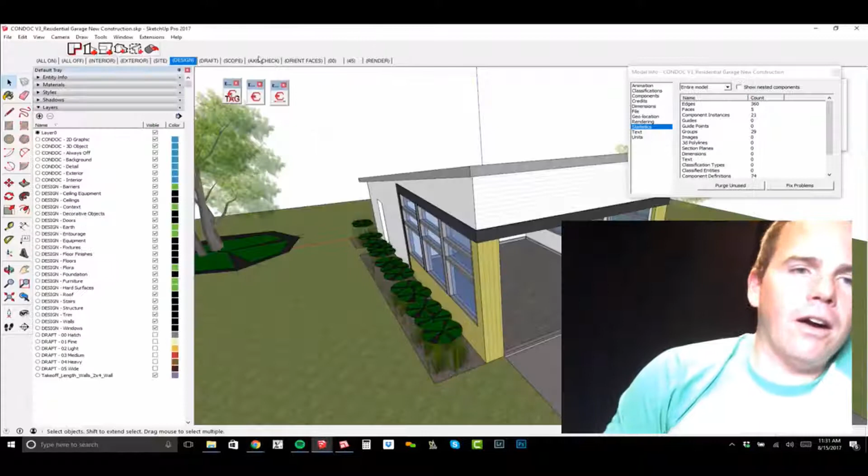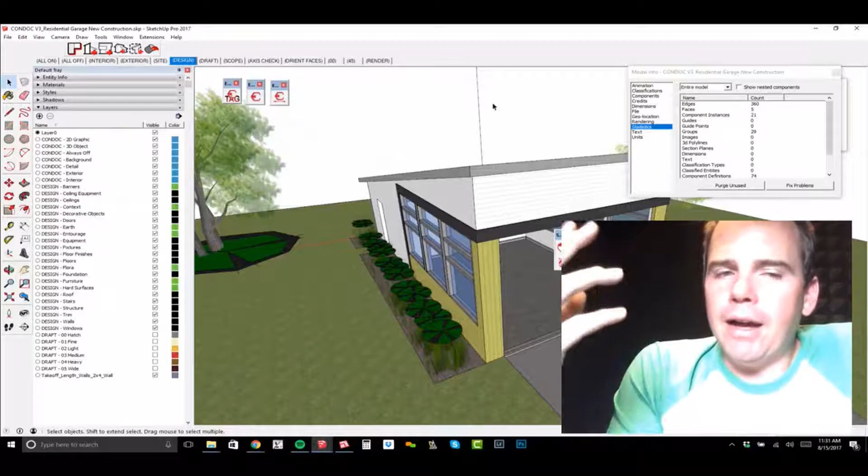Definitely. I gotta say, I've been tinkering around with Skalp, and it's working really well. It's pretty cool. Let me see if I've got it installed. I don't think I have it licensed on this computer. So anyway, I won't do a demo, but I will say that Skalp is working, it's really cool what it does, and I think it's well worth the $80. It seems, in my experience, that it works better on a simpler model, but I haven't gotten all the way in there and tinkered with every setting.

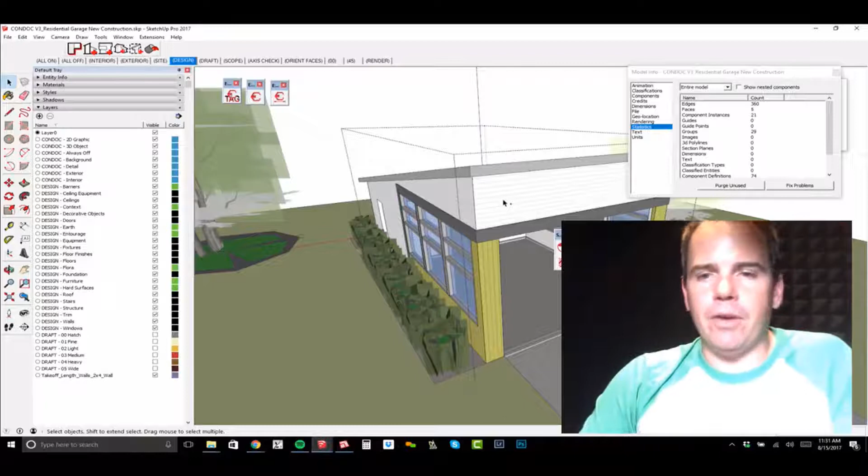I have a feeling that if I were to just hatch per layer, because of the way I build my models for CONDOC, I could hatch just the walls layer. That way it would potentially disregard everything else and maybe simplify that whole process. So anyways, I'm pretty confident that Skalp is going to be really solid.

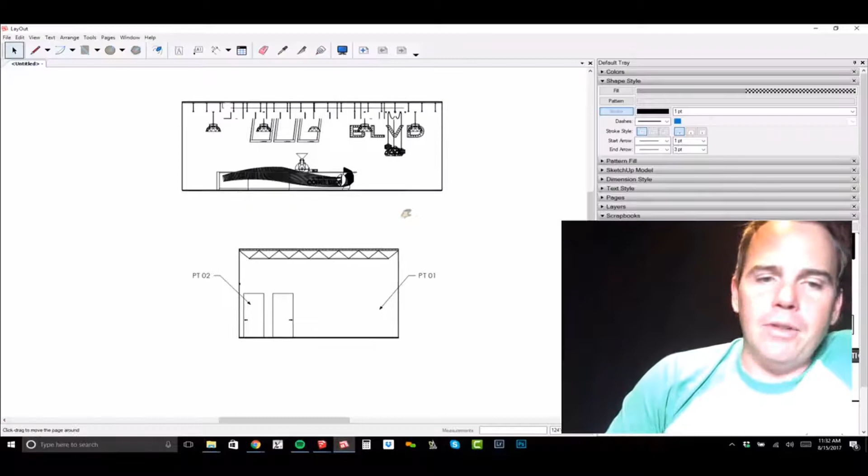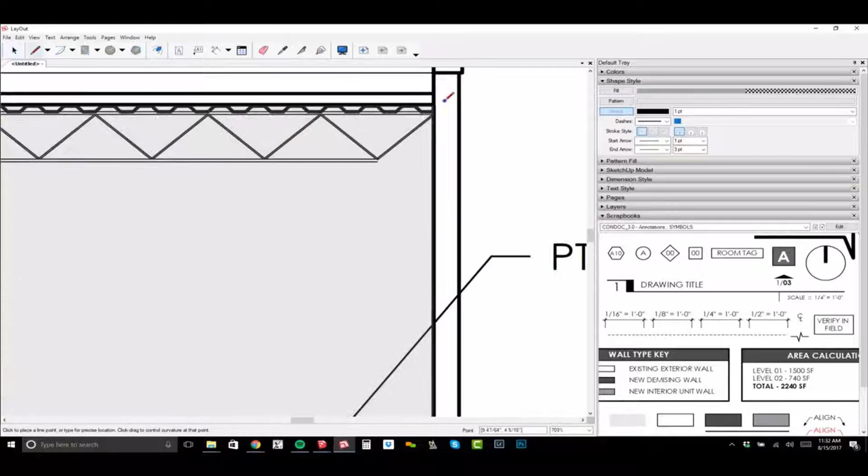But to answer your question directly, yes, you can absolutely go into LayOut and just hatch things out. If I double click in here, I'll release this clipping mask, and let's say trim this out like this. We're going to want to fix our clipping mask, and then I'm going to hatch this wall. So we'll adjust our clipping mask all the way around, down to here and to here. I'll reset that clipping mask, and then I want to hatch this in.

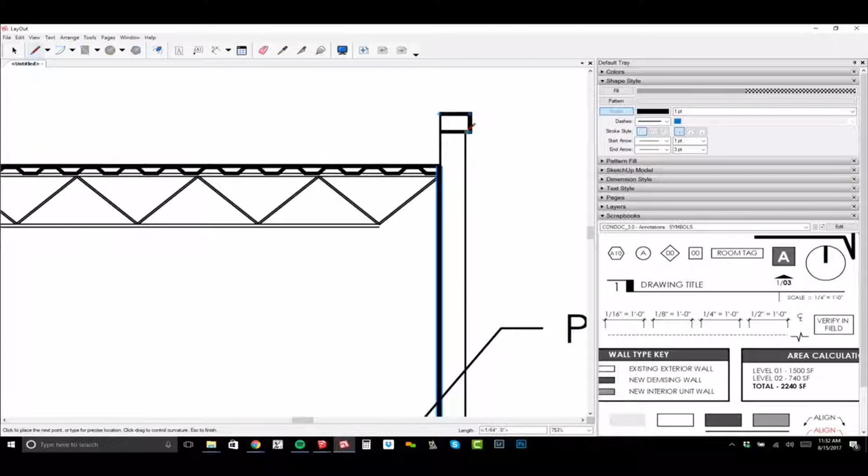So then what I would do is go into LayOut, and I would just draw this line in here. You can see that I do kind of have to dodge this other piece because it wants to join that geometry. So I went a little further, and then I'll double click on it and snap those points, that way it doesn't merge up with that other geometry.

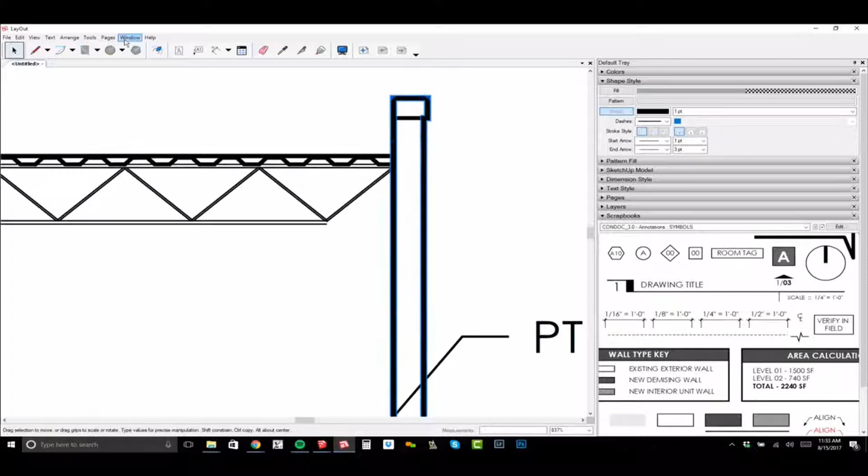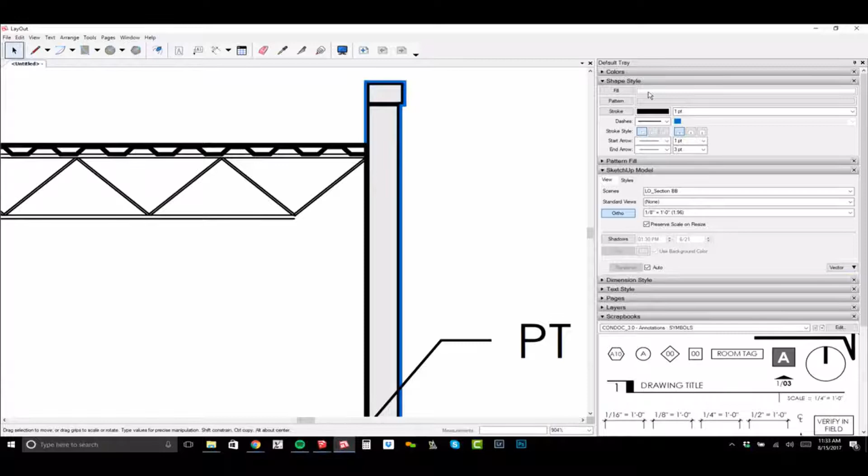I could choose to send this to the back and then give it a fill. This SketchUp model should maybe be vector, and if it's vector, maybe it'll just not have that background filling in. Let's see how that works. Yeah, there you go. And then the fill color on this — let me grab this, grab that piece, and make our fill color black. So that's definitely another way to do it.

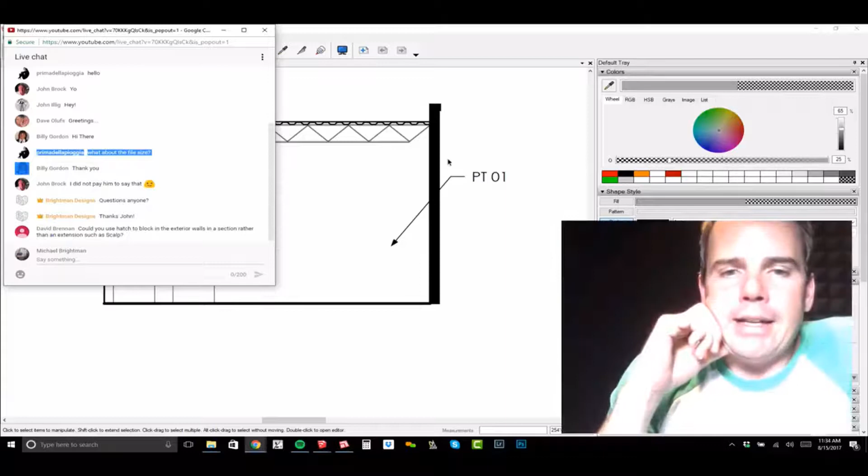But I gotta say, I'm pretty excited about revisiting Scalp. And there's another one called, let me see if I can make this work, Section Cut Face, and it's free. But I will say that it is definitely not as good as Scalp. It's not anywhere near as detailed, and way less options.

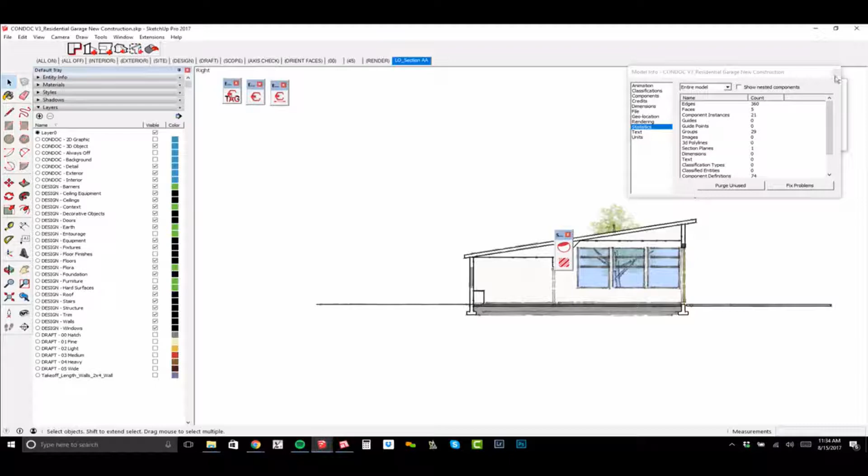So let me see, Condoc, let's go to settings, construction documents, and close that, go back to design. This small garage project is really perfect for messing around with Condoc and just understanding how this thing works.

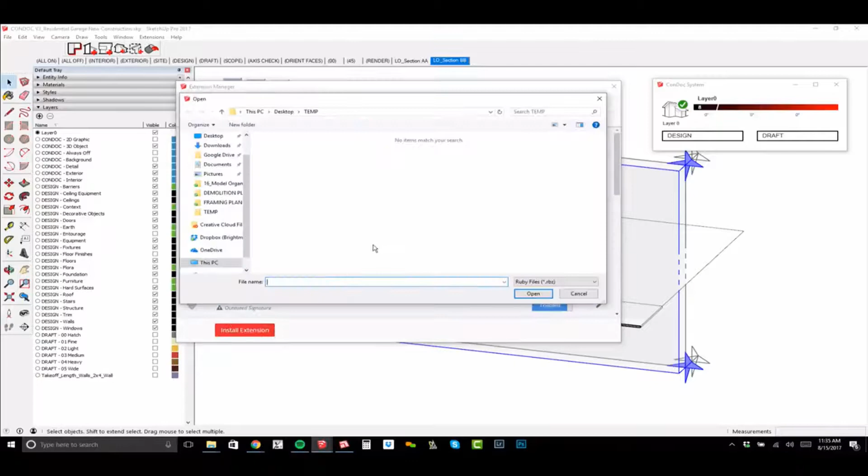All right, so there's my section BB, and then I think I have, if I turn on my section plane visibility — what is it called? I think it's called Section Cut Face. Let's see if I have it under my Dropbox, Brightman Designs, Resources, Plugins. Section Cut Face, I've got version 6 in here. Let's just install it and see what happens. So, Window, Extension Manager, Install, Dropbox, Brightman Designs, Resources, and Plugins, and we'll go to Section Cut Face version 6.

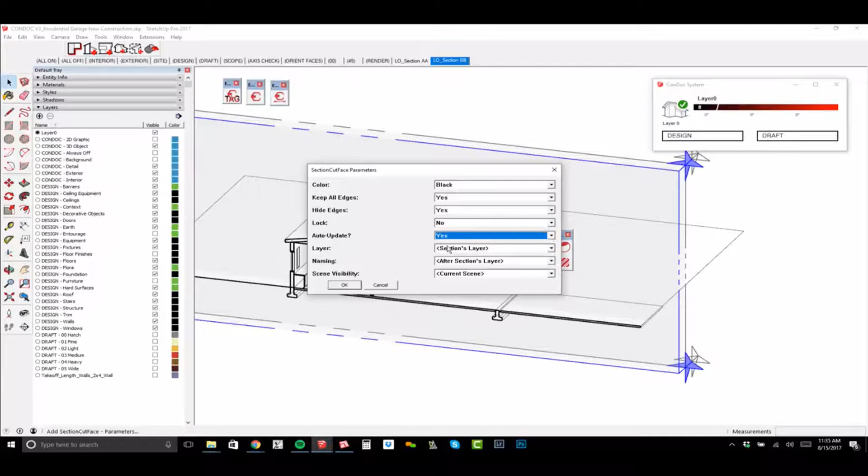All right, and then if I right click on this, I can choose Add Section Cut Face. The color is going to be black. Keep all edges, yes, I don't know. We'll just go with auto update — I do know that slows things down, but we'll leave it for a small model. We're good, whatever, I think we're all good there. I'll say okay. Now, see what happened?

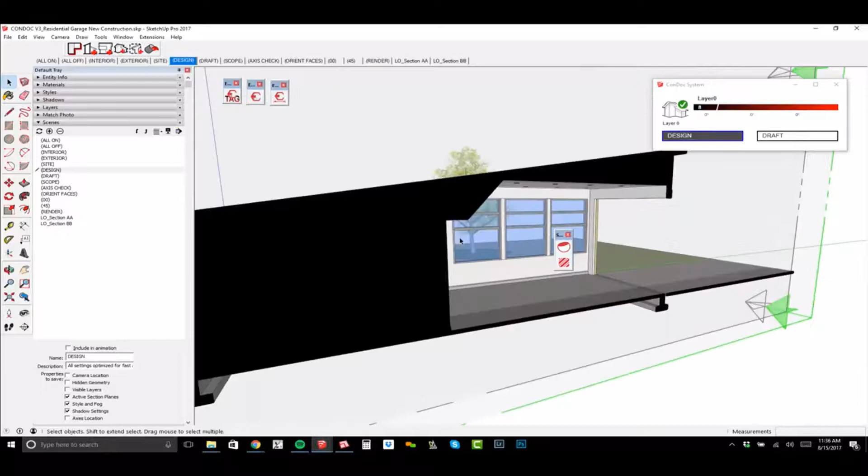So I'll turn off this visibility, and then let's go to our design style. Let me turn on F6. All right, see how it filled it in black? But notice what it did — it didn't recognize that back room was a void.

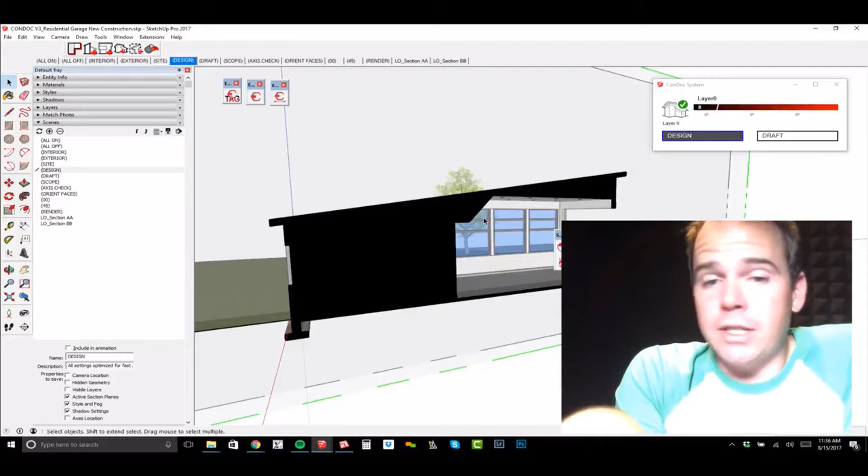And I gotta say that when I was messing with this, I was really discouraged, like man, I wish that worked right. I got into Scalp, and it seemed like they got that thing worked out. So I'm confident that we're going to come up with a pretty cool workflow for using Scalp to update your sections, but I'm still working on that. It does work together though, no problems there. So definitely check out Scalp — those guys are legit, and I'd recommend it over this Section Cut Face. It just seemed to goof up whenever I threw something more complex at it.